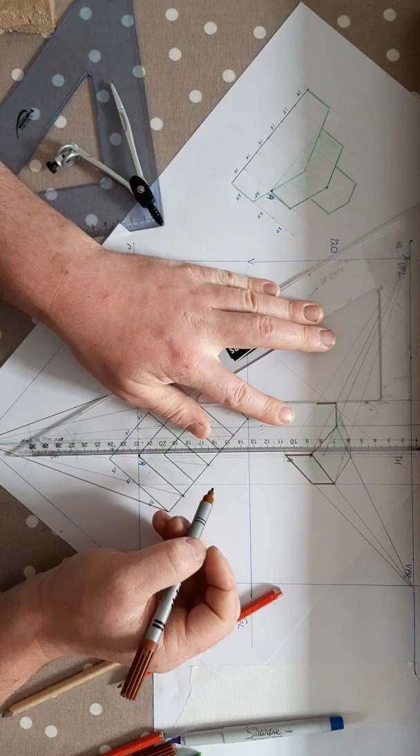Okay, so just a quick recap of what we've done so far in the last video. We got the middle section. I brought up A. A was my true height line, and onto that line, I'm going to be measuring all my true heights. So I'm just going to make that line stand out again. There's a line coming straight up from A. I'm going to put it dotted. That is my true height line. No matter what, if I'm putting a measurement from my elevation onto this, it'll be onto that true height line.

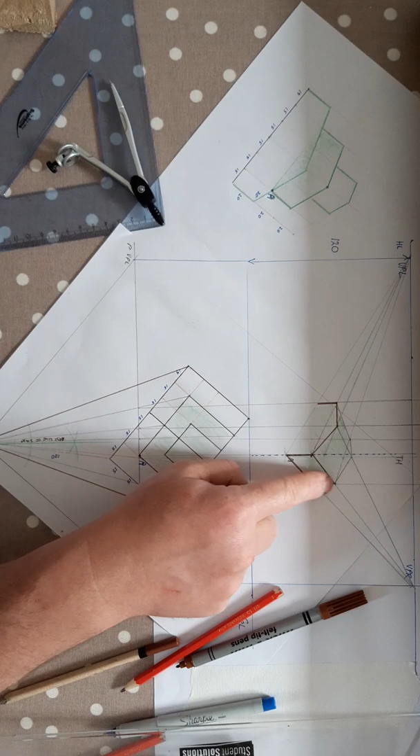We then got the middle object. We started with this edge here. We got the apex here. We then finished this off. We then got this surface here, and then we got the rest of it too. But we drew it all with just pencil, not with a finished marker like that, because some of that is not in the object.

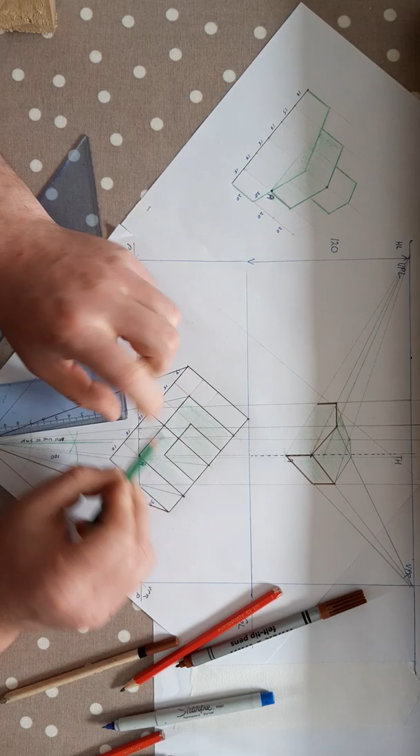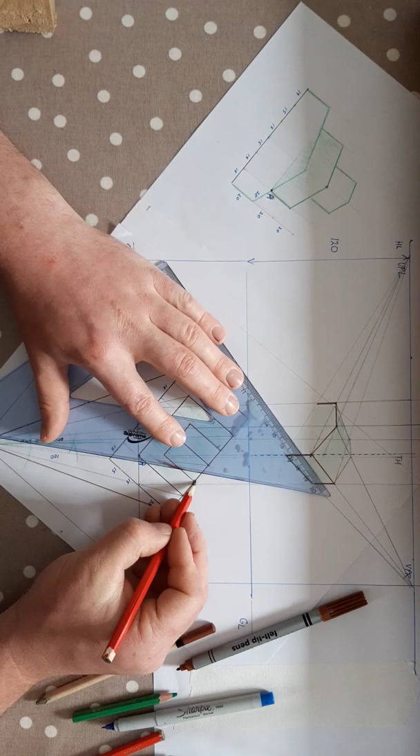Okay, so the next step I want to get in this video is to get the top section. So the top section, it's a little bit trickier this now because it's inside in the middle of the object, and there's a couple of ways you can start. I find the best way to start is to get this point here, which is on this line. So if I look at this point and bring it up from the picture plane, I'll get a dot somewhere here, and that can be my starting point. So this here, bring it back to the spectator, where it crosses the picture plane. I'm going to bring that straight up. And that finds a point right there.

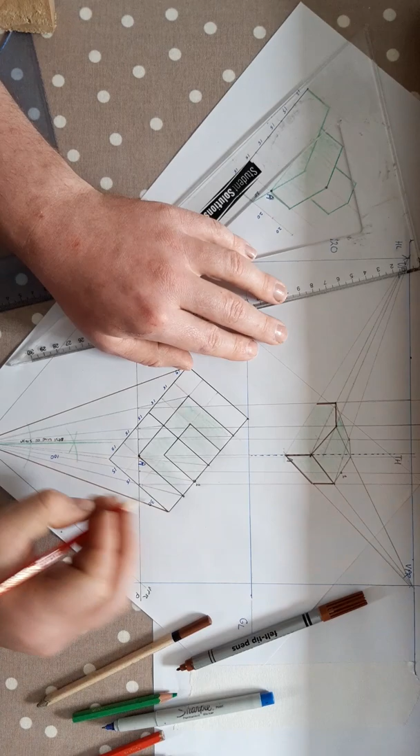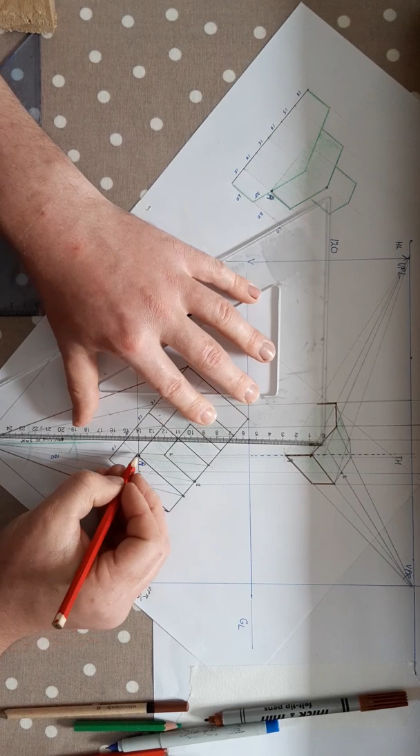Okay, so I'm going to call that dot 1. This here is point 1 in at the back. And I'm going to get this line here heading on out. So VPR, through 1 heading on out. I now need to get where that finishes. That will be this point here. We'll call it 2. We'll bring 2 back to the spectator. Bring it straight up. There is point 2. And that is straight away then is a finished line. 1 to 2 is found. I can join 1 to 2.

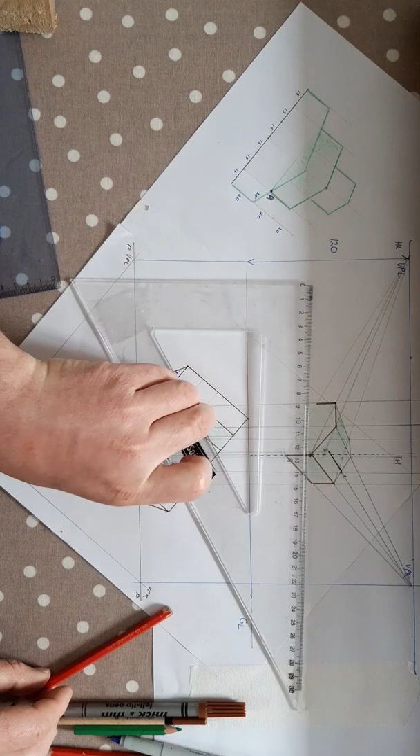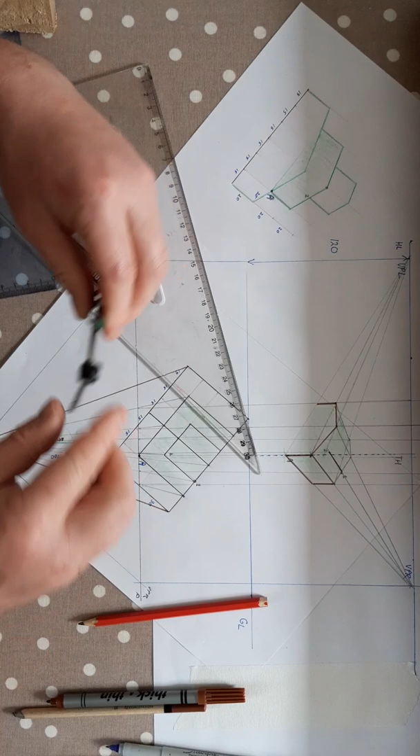Now, there is this edge here. That's where 2 is at the moment. I need to get this line going up from 2. So again, I'm going to get my compass and I'm going to go to my true height line with a height of it. So I'm taking the height that I want from the ground up. I go to my true height line. I mark on that height.

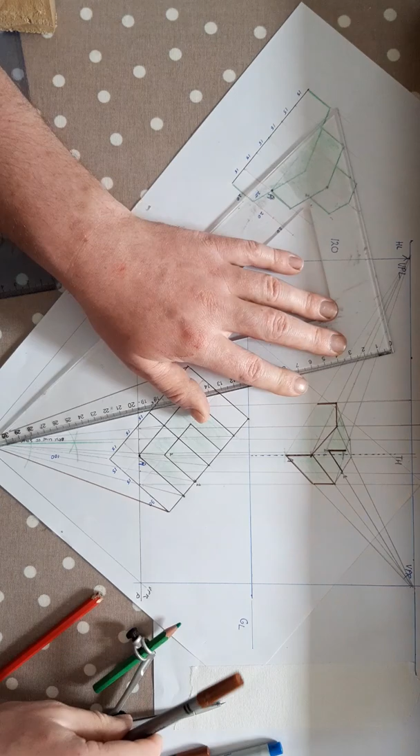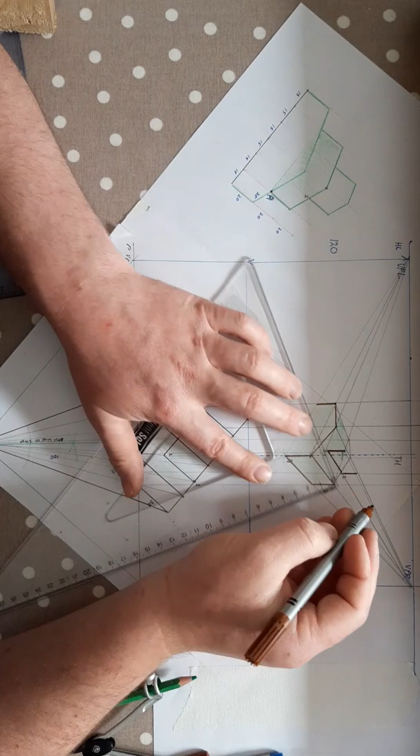Now that's on, a little bit in from A. See, A is on a different line. So I just have to take that true height line there, bring it back to VPL, and then go straight up from 2. You might need to zoom in on the camera to see that, but that straight away then finds another finish line. I'm going to bring the top of that back to VPR. And I'm going to go straight up from 1. And that again is another finish line. And the line going across from the 2 of them is also another finish line. So that's another surface got.

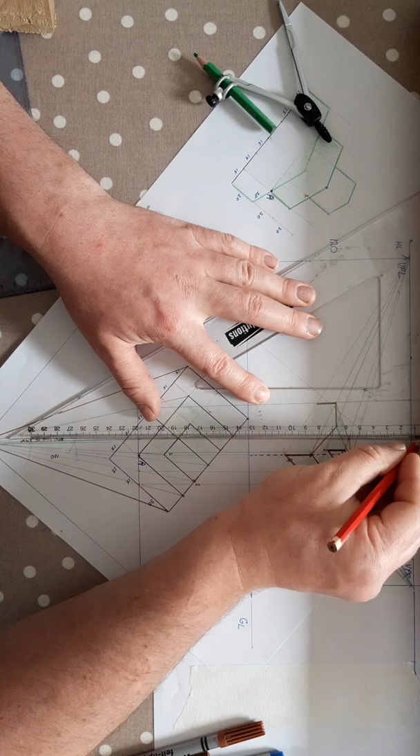Next I want to get is the apex. Okay, the highest point. So again, I get the height of the object from top to bottom. And I put that onto my true height line. So it's just there. And I'm going to join that again back to VPL. I now need to look at that apex. So I bring that point there, back to S, where it crosses the window. I bring it straight up. And where that crosses that, right there, that is the height of the object. And that is a sloping line going down like so.

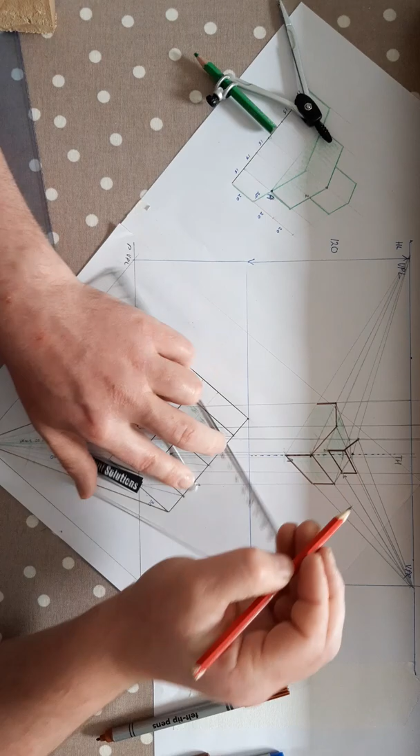Again, I can join that apex back to VPR. I need to find where it finishes. So that would be this point here. Bring it back to S. Bring it straight up. There it is there. And there is another finish line got. And then the top line is also finished.

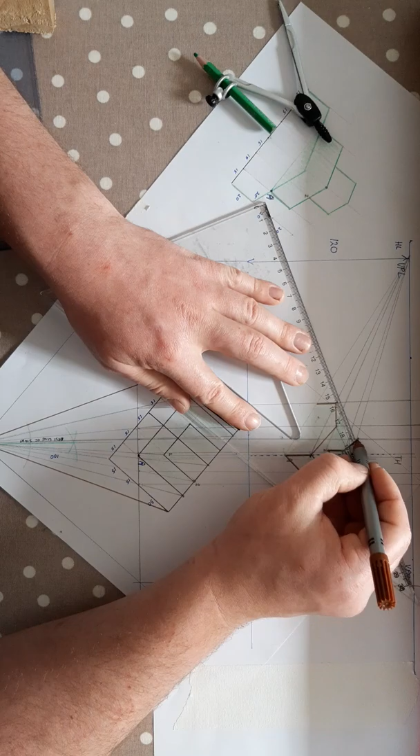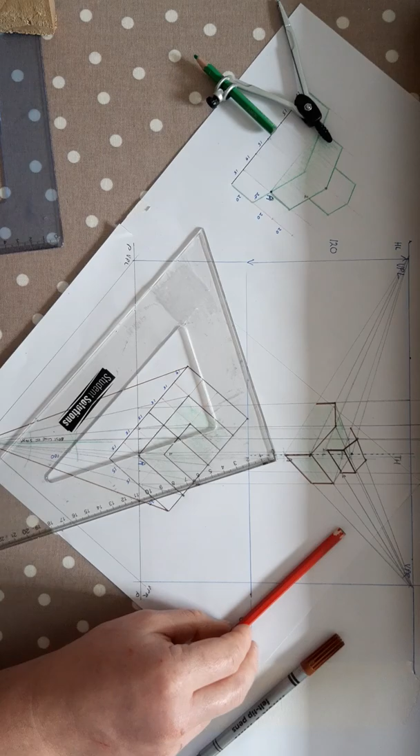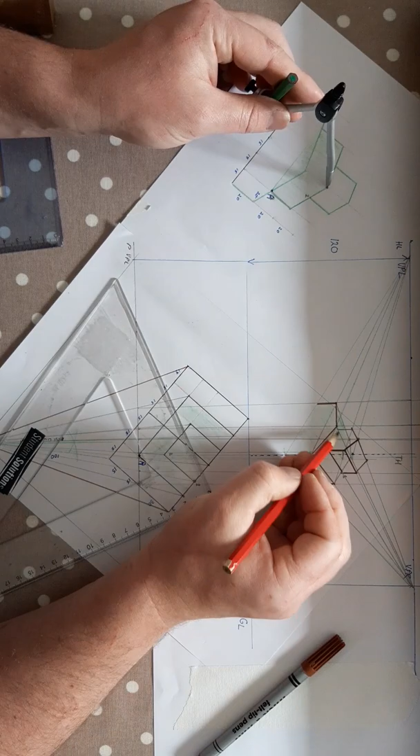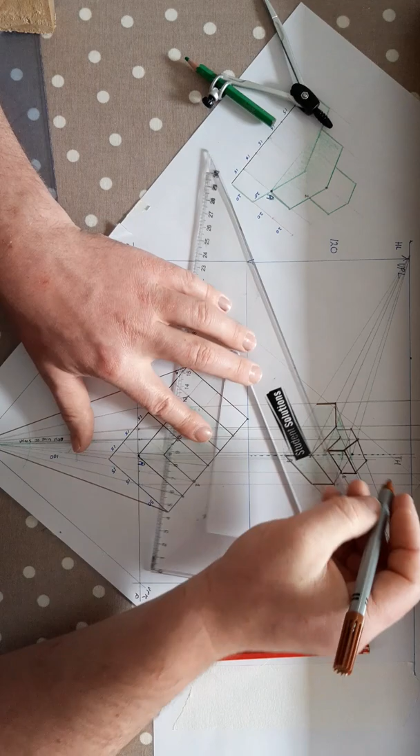So all I have to do is bring this up to it. So look at this point here, where it crosses the picture plane, bring it straight up. It is here, and that gets the next slope. Then this little short line here coming out is finished. And this line coming down here to that is finished. And now what we have is got the top of the object. So there's a couple of lines from the last video I couldn't draw in heavy that I can draw in heavy now. This line here is heavy. And this line heading out here is heavy.

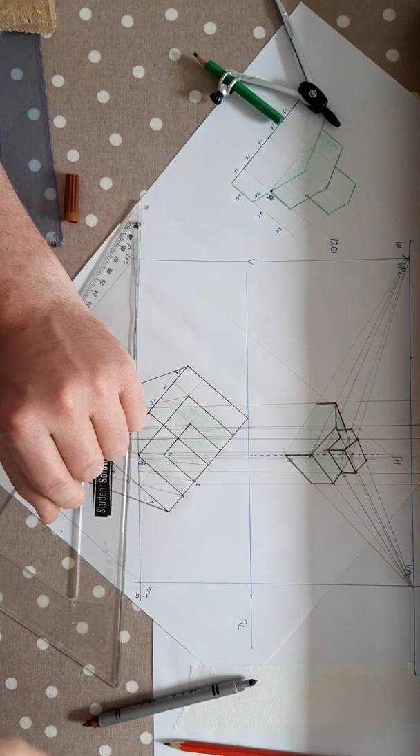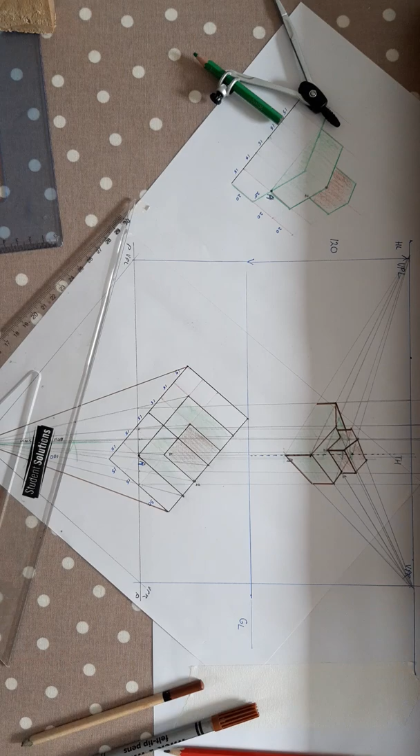Okay, so that has found all of this, which is this surface in plan and this surface in elevation. Okay, now it looks a bit sideways, but that's normal because the whole thing is going to end up looking quite large here at the very front corner, all because of the location of A. A is not, you see, on the ground line. A is up, which means the whole object is going to come out, which you're going to see in the third video.